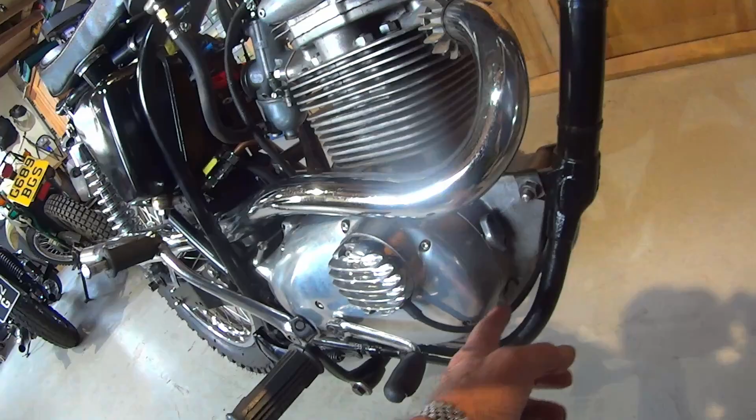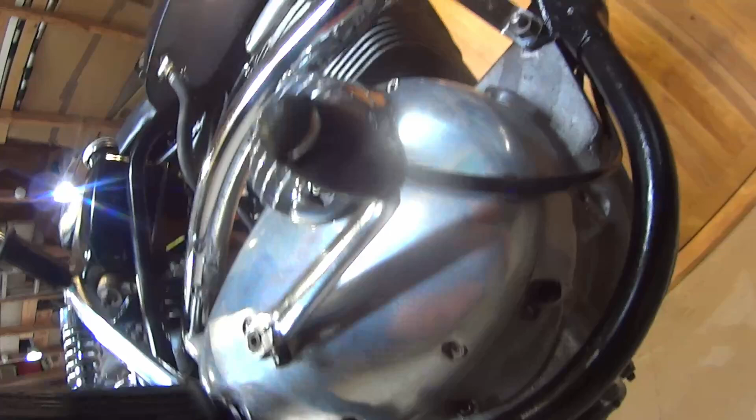This one's just the spring and the ball bearing, which I've renewed, and they also have a port there for an oil pressure switch, but there isn't on the pre-69s, or maybe they changed at some point in 69, but there is a drill and a tapping there. It looks like either quarter gas or NPT, I don't know, and that cross drilling goes up into the feed directly into the crankshaft, so it's after the PRV.

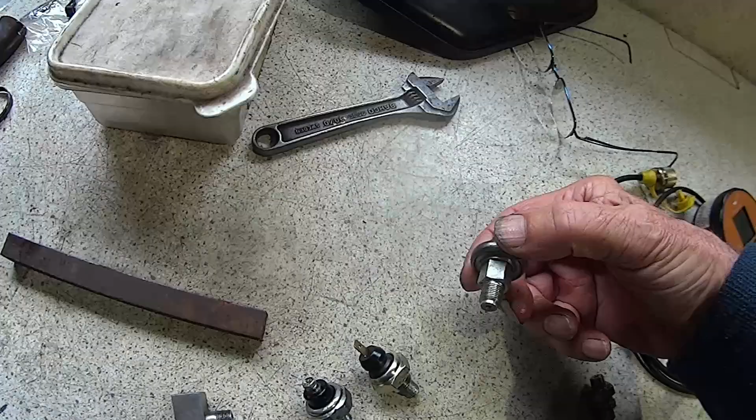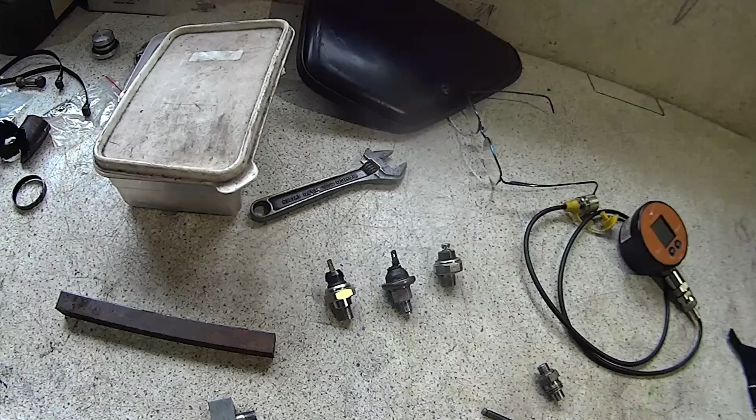So I thought, oh yeah, I've got a few pressure switches. That one's off a Bonnie. I'm not sure what that's off, whatever. I've got a couple anyway, but they're all a tad too long. But I used to have a classic Mini, a '69 Cooper, and at one stage I put a gauge and the switch in, so I made that out of a block of mild steel.

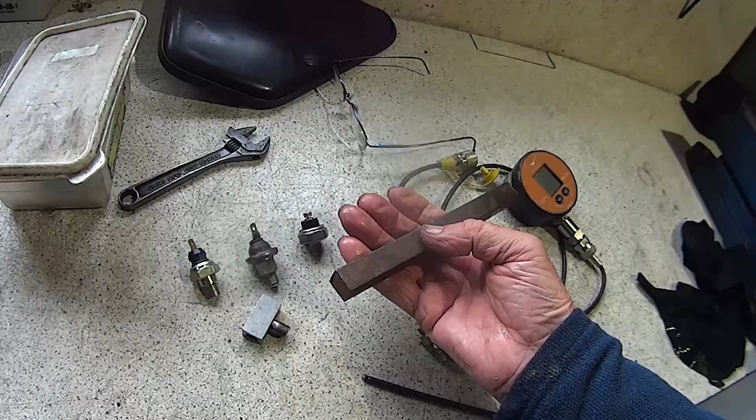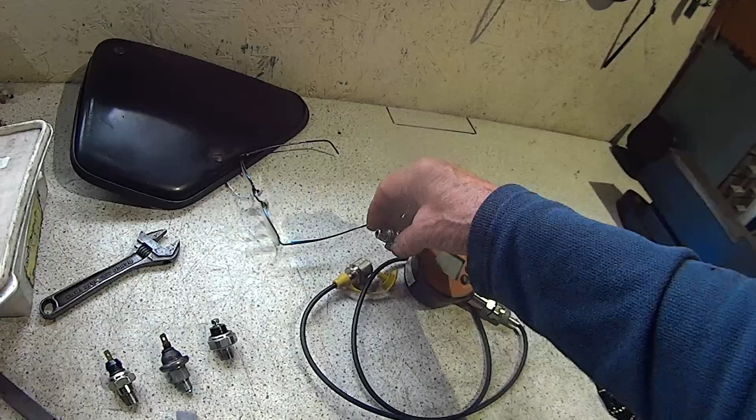So I was just wondering, I've got some 1/2 inch or 12mm or whatever it is mild steel, make one of those but male female, then it'll bring it out at 90 degrees. Because the other thing is I can't get the gauge in. This is the gauge, it's a Stauff style coupling. It's a really high quality digital gauge, so that's NPT or quarter, so that would go in, but it just won't go in because the frame's in the way.

So I'm going to have a go at making one of these, kind of the other way round. So I'm just going to throw that in the lathe. Take the plug out first, have another look, throw that in the lathe and see what's possible. So back in a short while.

Okay, so cut a lump off. I've turned it up and I've threaded it quarter gas, but what I did is I've done it slightly oversized and slightly tapered, because obviously I've got a quarter gas die, sorry, 8th gas die. I've wound the centre of the die in, so I've expanded it as much as I could, so I have managed to get a bit of a taper on there.

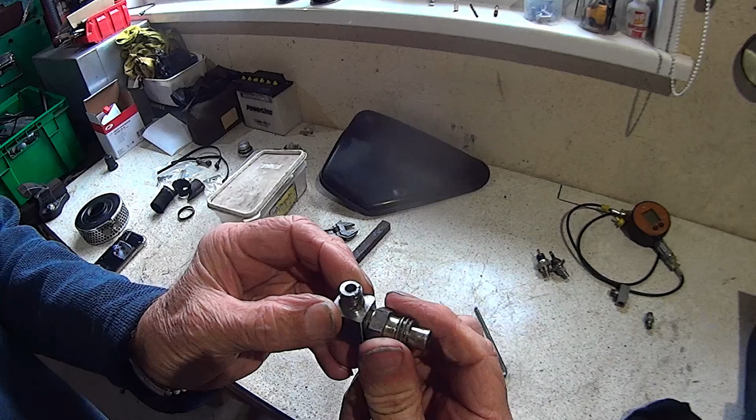It does screw in, I've tried it, so I've just centre punched it now, ready to see if I can get my device in so I can put the gauge on. So nearly there, a bit more drilling and tapping, be back directly. Okay, there we go, we're done, and that's my Stauff coupling for the gauge. That's going to work, and then gauge out when it's done.

One of these will do. Probably put that one in because it's got a circular terminal on it for vibrations, and that's for the oil light. So let's fasten it on the bike and see what it looks like.

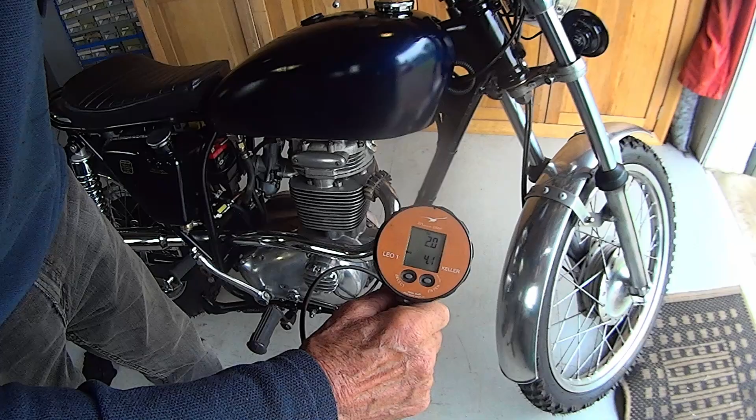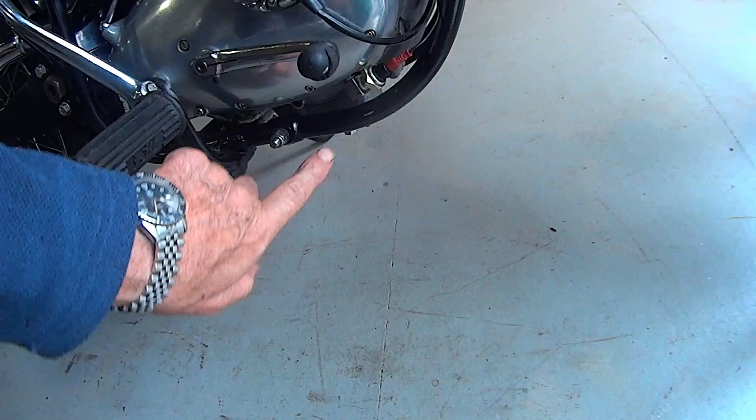So we're done. I haven't got a bulb and a bulb holder yet, but the switch is in, and I did have a spare wire down the spine which goes into the headlight. So I'm going to fit the bulb holder there in that aluminium plate, and there's the switch fitted. So I don't think it's going to get knocked there. Not too bad. I could fold it in a little bit more, maybe. But here's some of the readings.

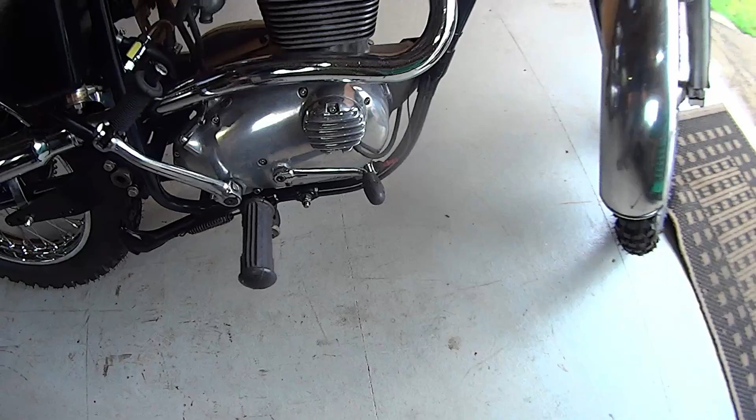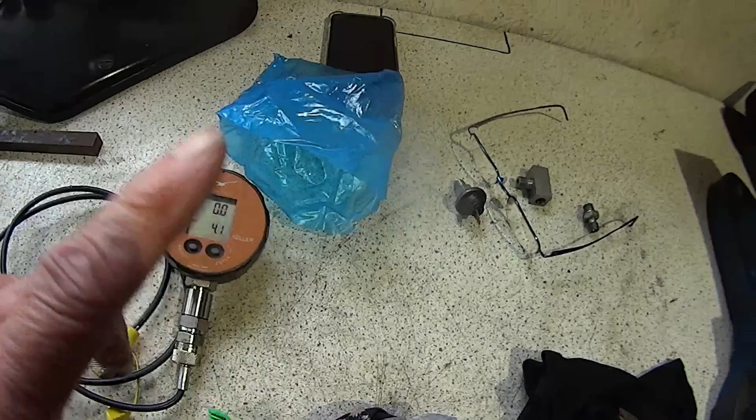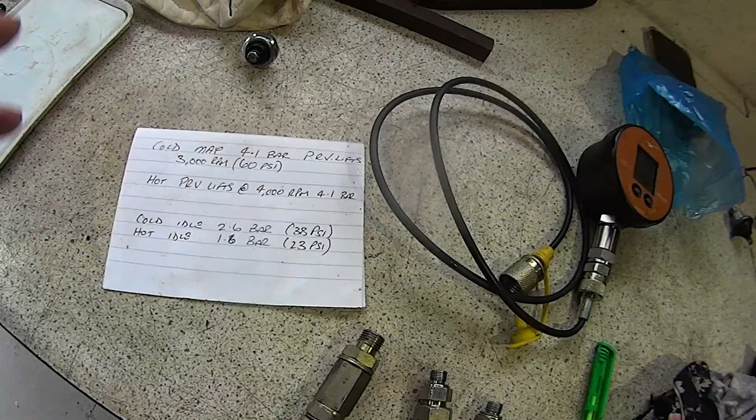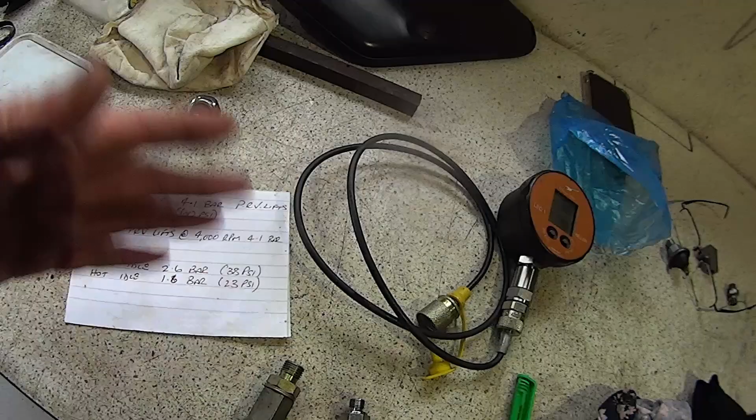So this is a very accurate gauge, by the way. It was on max peak hold. So when the engine was cold, at about 3000 RPM, the PRV lifted off. So cold, 4.1 bar the PRV lifts, which is around about 3000 RPM, so 4.1 bar, in old money 60 psi. When the engine was hot, you need another 1000 RPM to get it to lift. So obviously the PRV, hot or cold, that's not going to change, is it? It's going to lift at 4.1 bar, just dependent on the RPM.

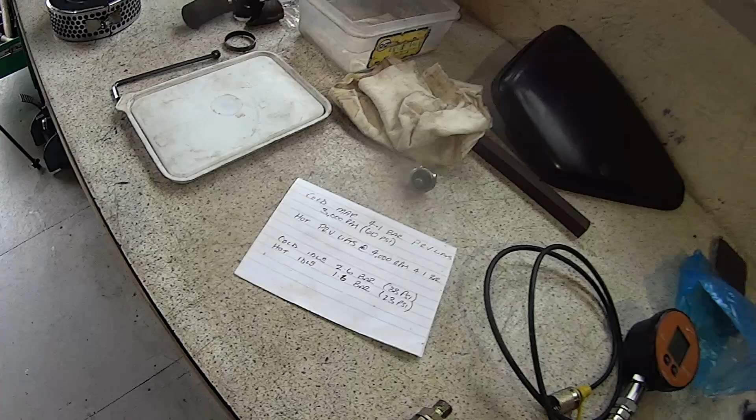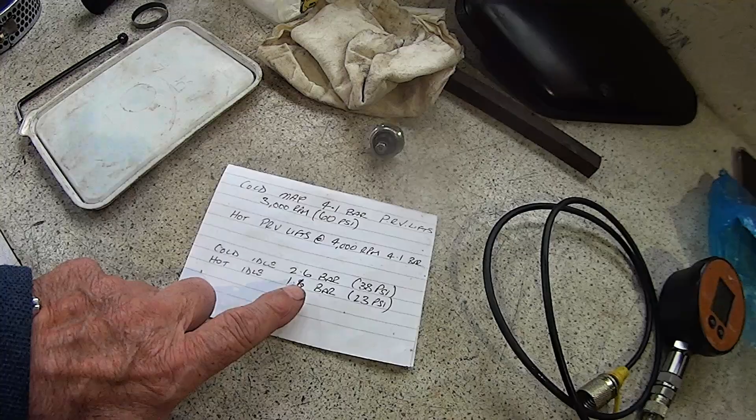This is the bit I was interested in. When I first put it in and the bike was cold, it was 2.6 bar. It ticks over about, I don't know, 850 or something RPM. So that's 38 psi cold. Left it running for quite a while. Got it hot, crankcase hot. Could feel the oil tank was quite warm. And it dropped by a bar, which I thought was quite dramatic, but it's still on idle, 23 psi, 1.6 bar.

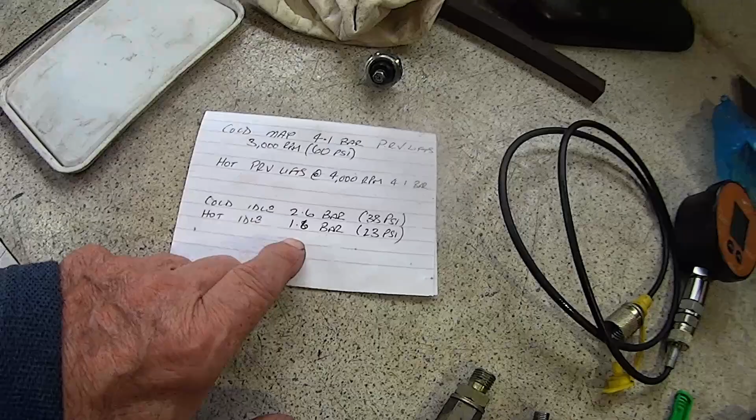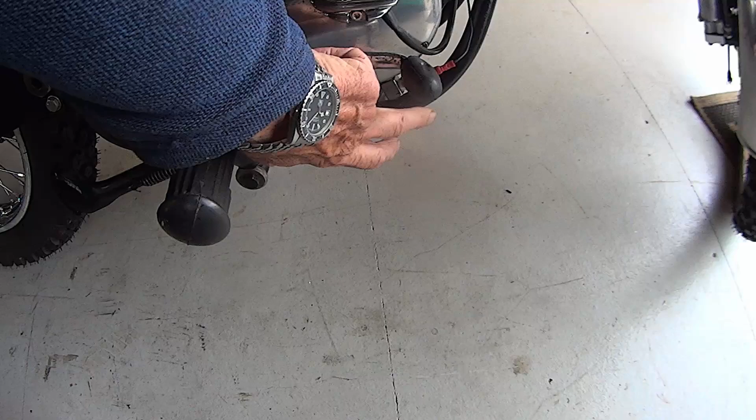And the switch, that one's for a Daytona, and it's 0.5 of a bar. So 7 psi it opens, below that it closes. So I don't really want to know what the oil pressure is perpetually, because you'd end up watching the oil pressure gauge while it's dropping, you know. But the light is nice. If the light comes on, you've got an issue. So I'm happy with just the bulb, but it was just interesting to see what the oil pressure is.

Obviously on the later ones, 1971, is it, or mid 70 onwards, when they changed to the cartridge type pressure relief valve, they gave you the extra port, high level, which was dedicated for a pressure switch. But on this early stuff there was no way you could find out. But that little port at the bottom goes directly into the gallery feed after the PRV, into the end feed of the crank. So it's just as good as the later ones recording-wise. It's in the right place.

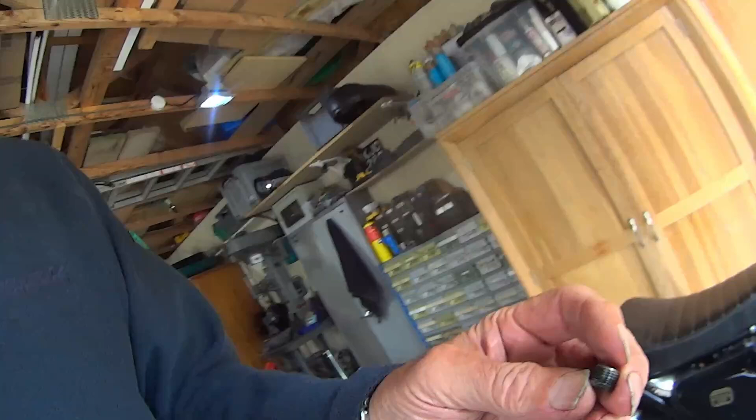So if you are putting something tapered in there, be very, very careful you don't over tighten anything, because of the power you can get sideways on a thread, on a taper, you may end up splitting the aluminium case because it's only soft. So don't wind it in like mad. Take care. Plenty of thread tape or hydraulic seal, and job's a good one.

So spraying the tank next, and that's it. Still not got another project yet though, but a couple of things in the pipeline.